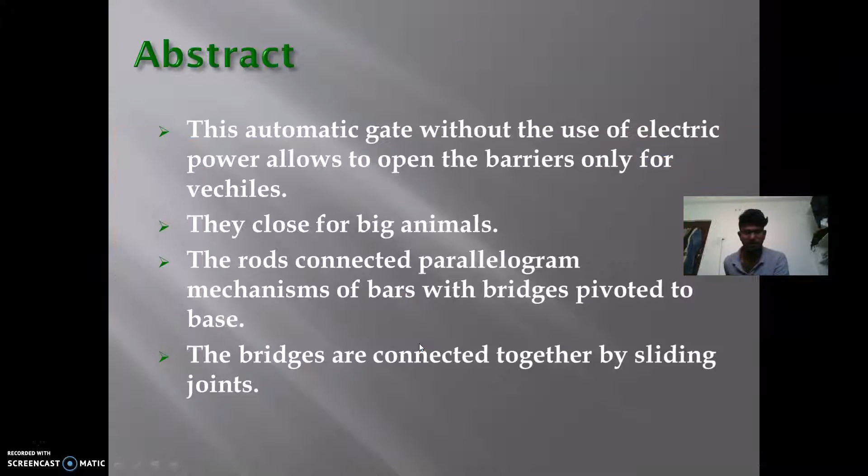Okay, and the parts to make this mini project are: first one, plywood, and the specifications of this plywood are the thickness. The thicknesses that we used in the project are 30.18 mm, 4.78 mm, 65.5 mm sheets.

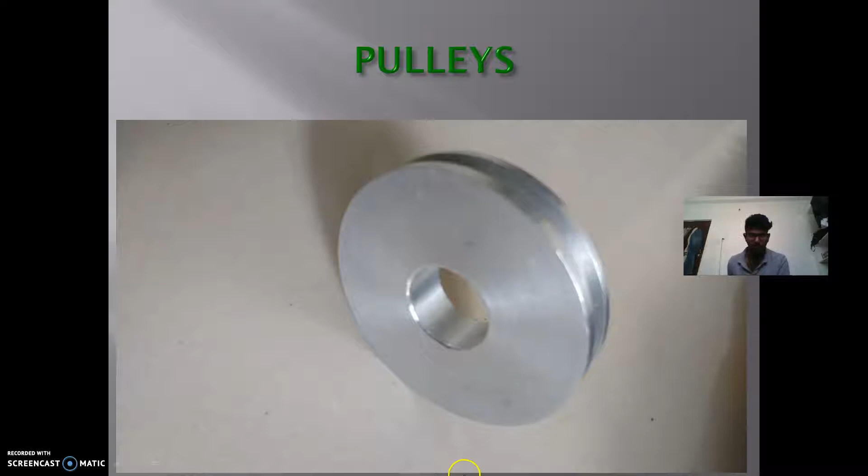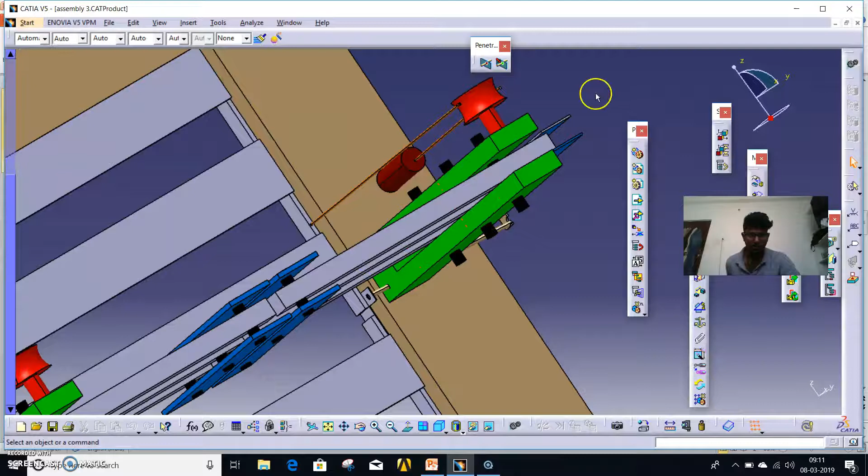This is my CATIA file. This is the groove, and this is the thickness from this surface to this surface, and this is the thickness. Okay, 26.91.

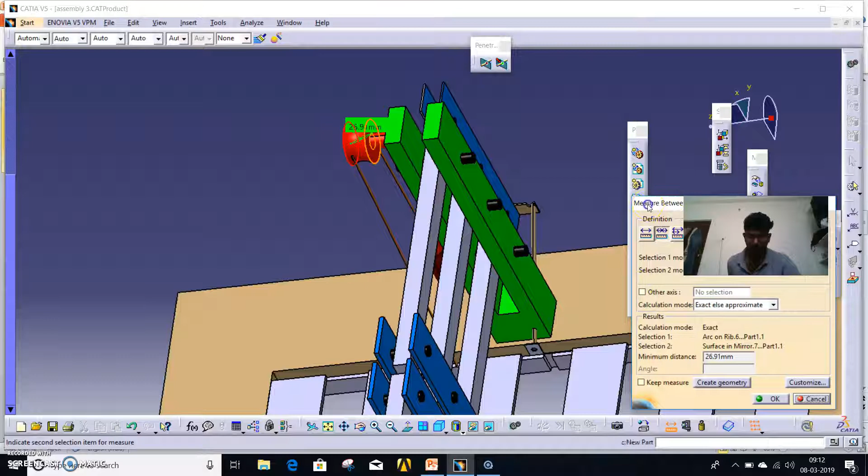And groove 5, the material used is aluminium, and wires, which are used to connect the platform of the bridge and the weights, passing through the pulley. The specifications of this wire: diameter 5 mm, material nylon, tensile strength 92.7 megapascal, tensile modulus 2.93 gigapascal.

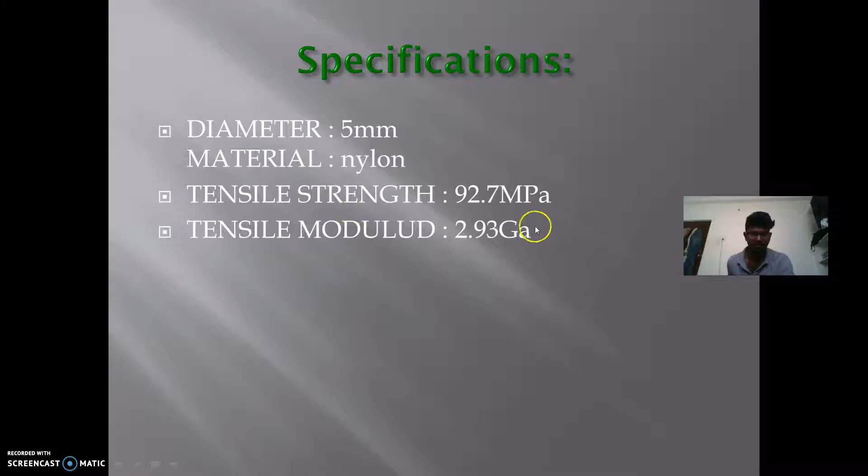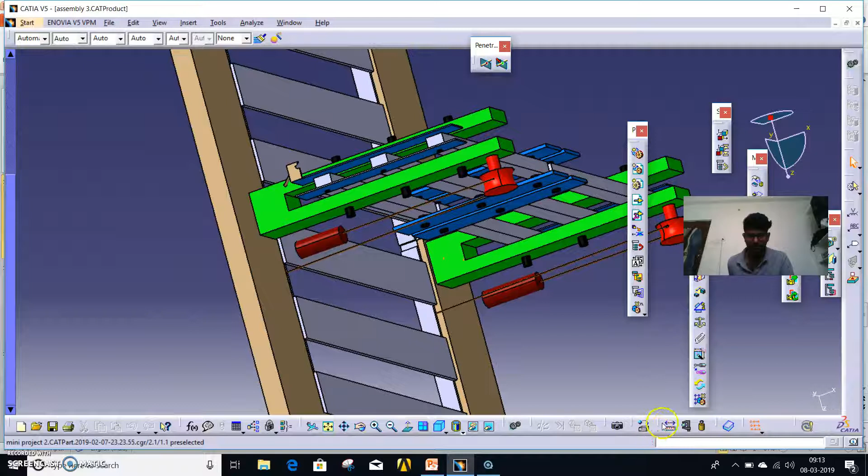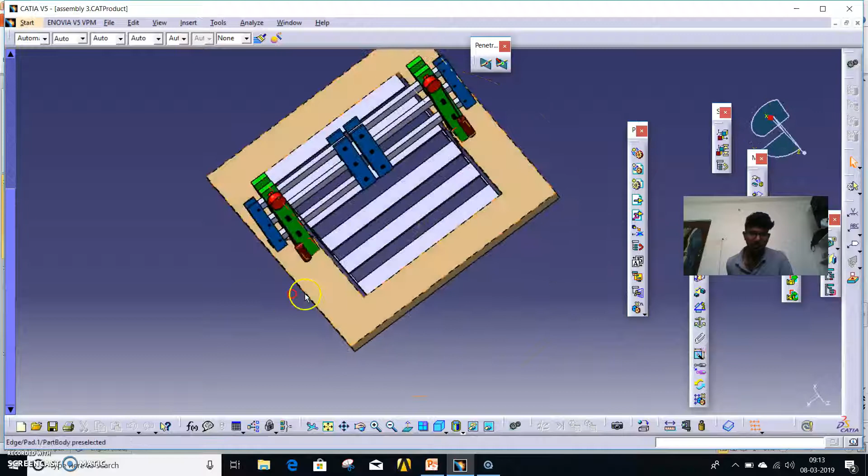This is my CATIA file. The thickness of this sheet, which is the base, is 30.18 mm, and the area of this sheet is 0.32 square meters total area.

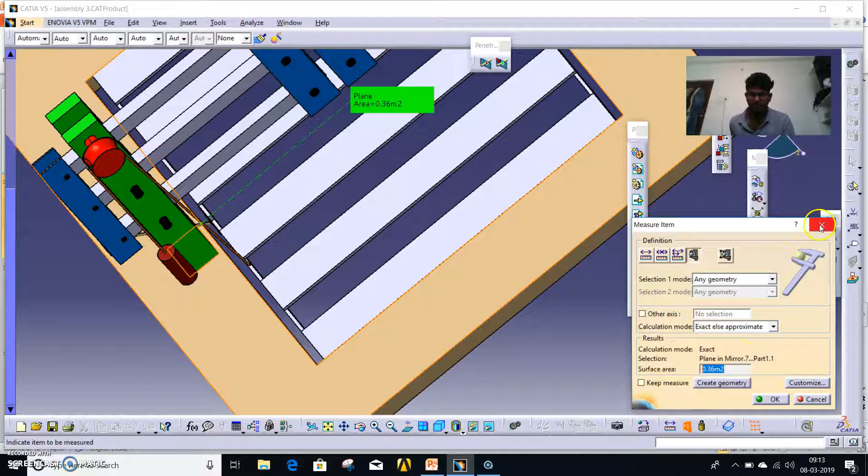The weight that we used: the radius of this cylinder is 12.95 mm and surface area 0.01 square meters, which is shown here.

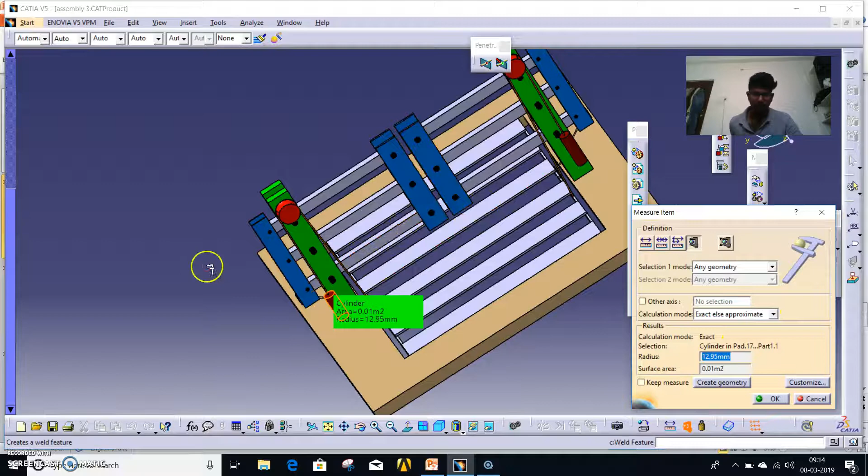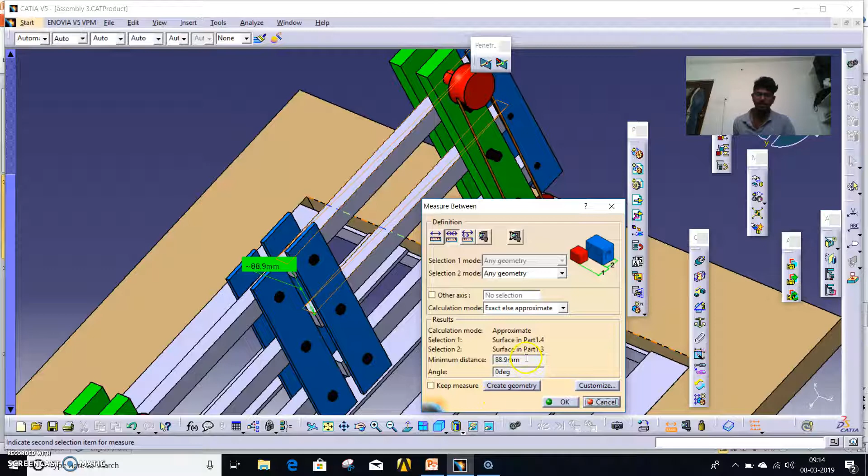And the distance between each of the parallel plates is from this surface to this surface, which is 88.9 mm, and the thickness of these parallel plates is from this surface to this surface, which is 25.4 mm, which is 1 inch.

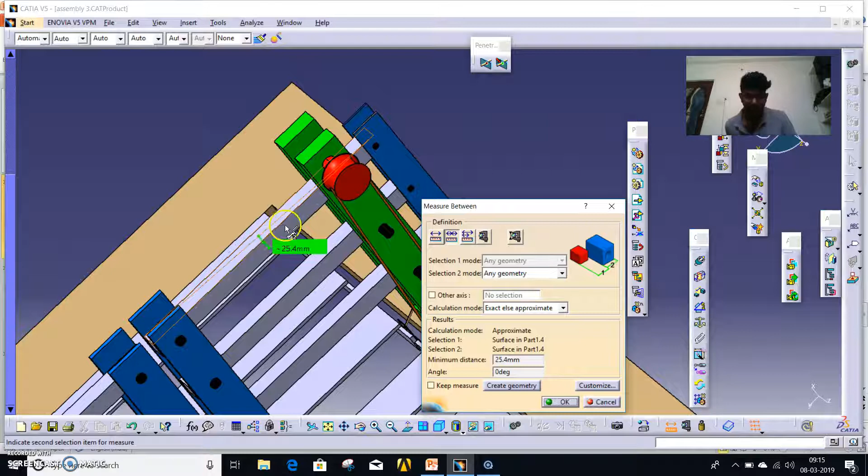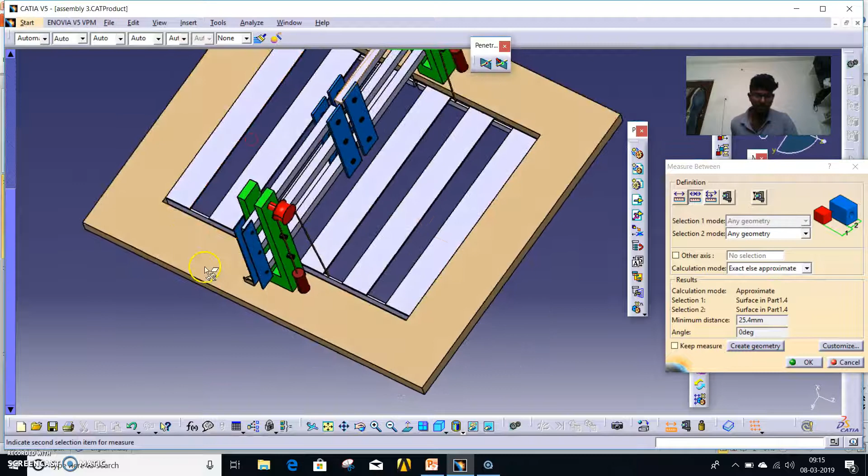And in this figure the vehicle comes from this side to this side. At that time the angle of the barriers will reduce and fully rotate. Automatically the weight lifts up, and the gates are opened.

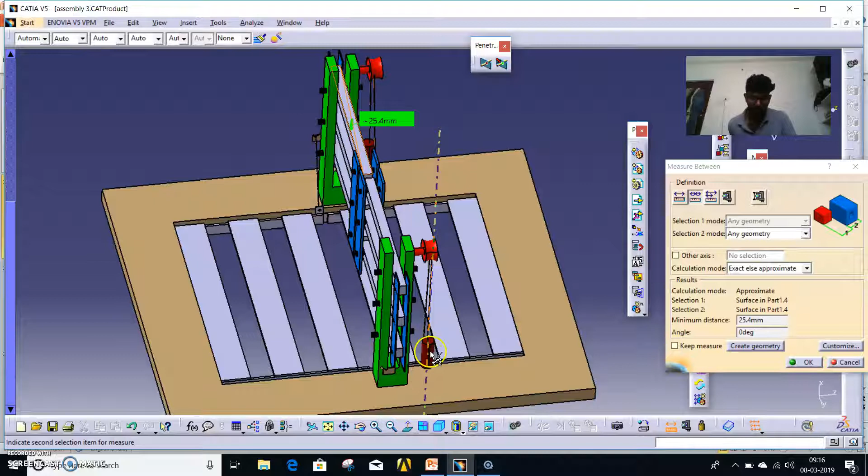And when the vehicle leaves this bridge, the angle of this wood moves up. At that time the load which came up and the threads here move down, so that the gates will close.

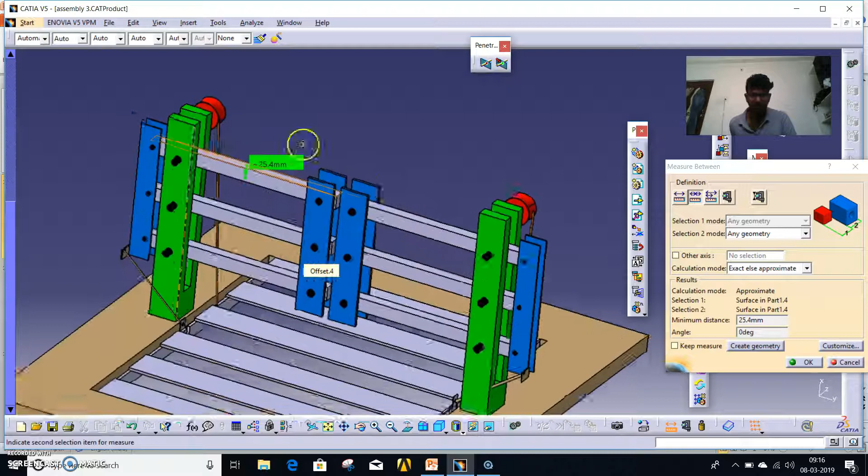And the simulation of this is not possible because I did it in the CATIA assembly, so it is very difficult. So the simulation is not showing here, it is just an assembly.

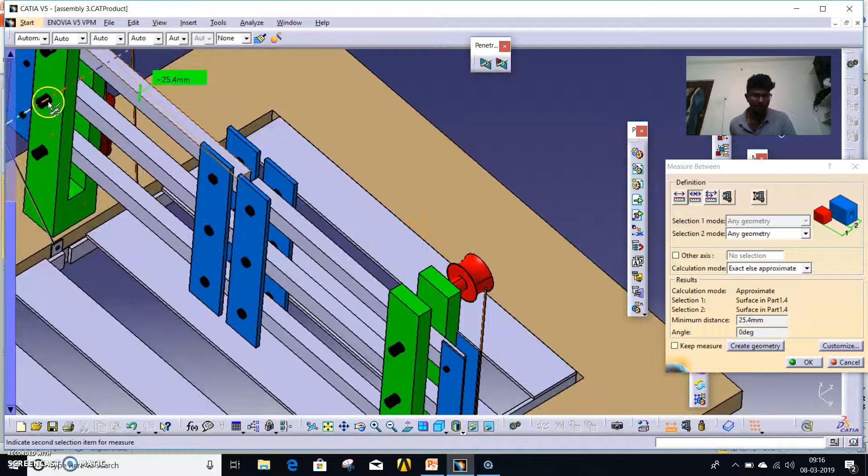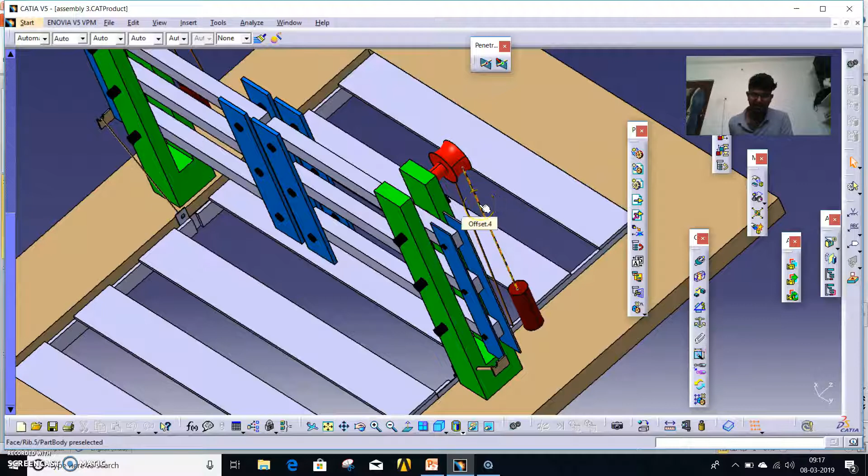And here these are the pivots which hold and rotate these parallel points here, and this is all made of wood only, except this pulley, which is made of aluminium, and this is the thread which is connected to the load and the pulley, and these blue ones are also the supports of these parallel points, which are very strong.

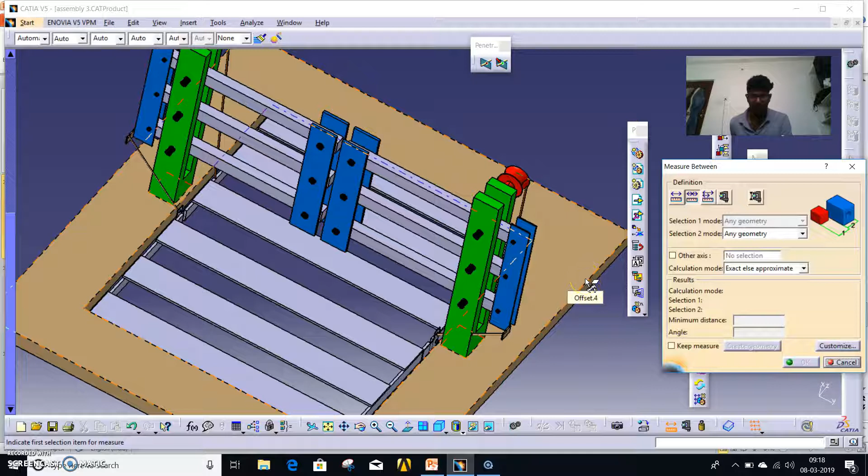And the thickness that is mentioned for the wood: this wood thickness is 30.18 mm, and this wood thickness is 4.78 mm, which is mentioned in the specifications box, and this wood thickness is 63.5 mm, and the inner hole is 1 inch, 25.4 mm.

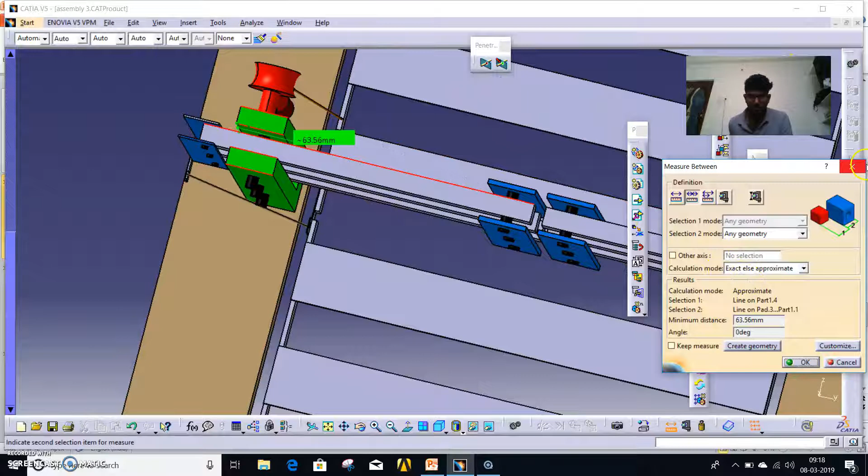The gap between these two parallel faces is nearly 60. No, no, no, it's wrong. The gap between these faces is nearly 63.56 mm. This is to rotate with these pivots, so I kept it like that.

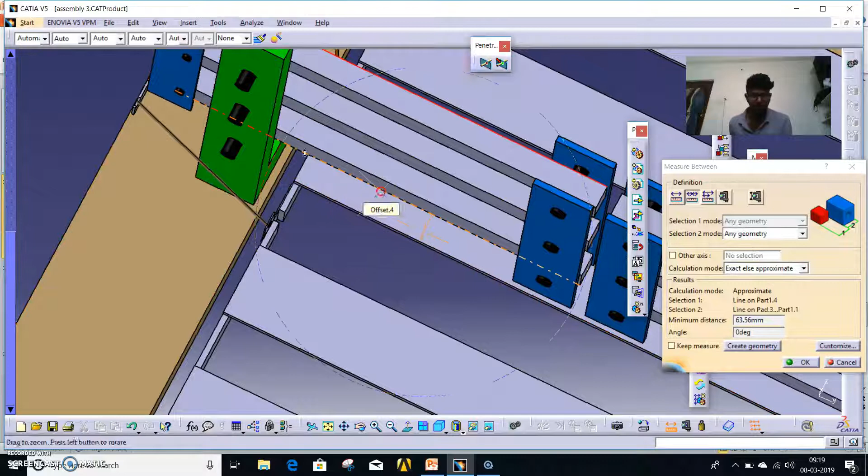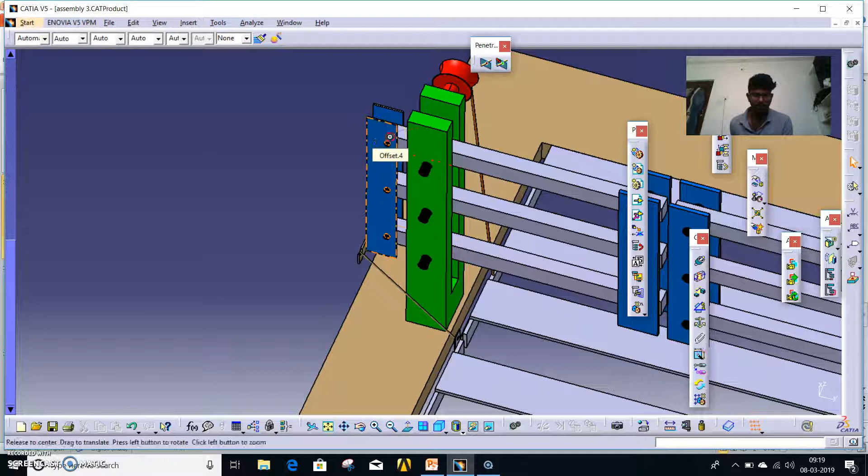The main motto of this design is to reduce the cost and the material wastage also. So it helps for the production. And the thickness of these blue plates is from this line to that line. So these are all made from plywood only.

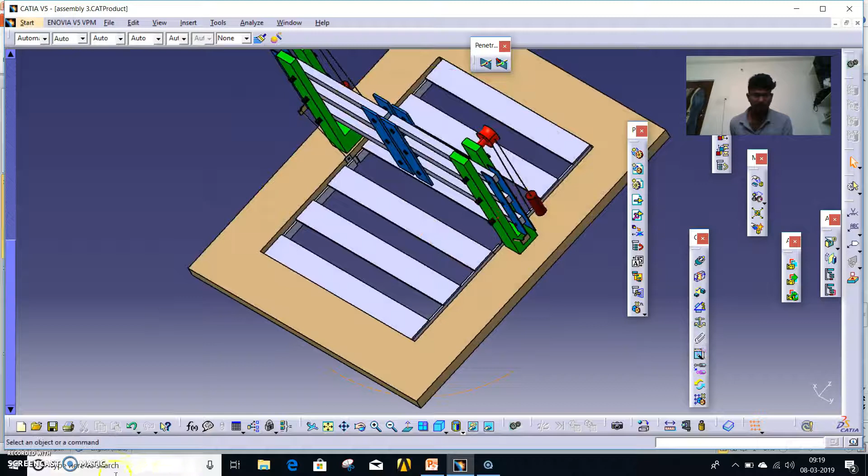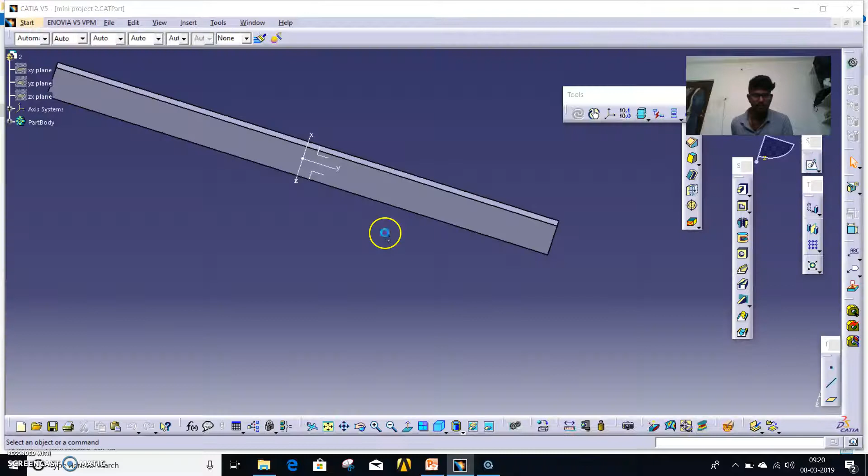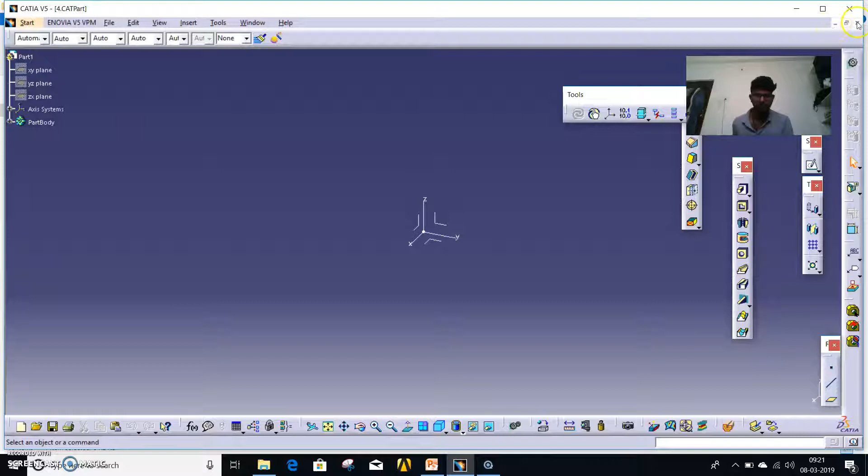The parts to assemble are: this is the first one, part one, and this is part two, and this is part three, which is assembled. And these are the parts.

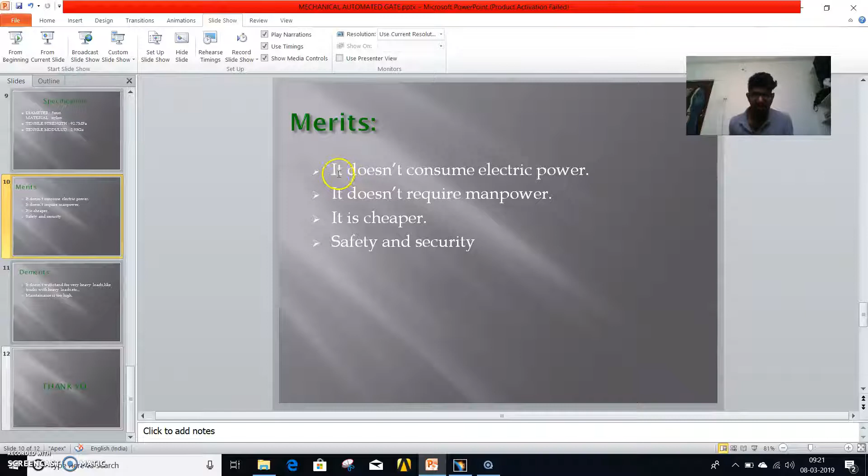And the merits and demerits are: merits, it doesn't consume electric power. It doesn't require manpower. It's cheap, safe, and secure. The demerits are it doesn't withstand very high loads because it is made of wood, like trucks with heavy loads, etc.